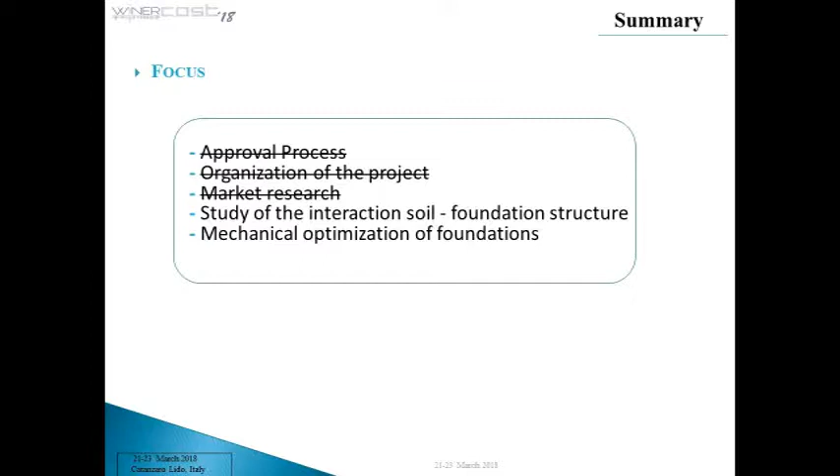The unexpected absence of Mr. Severini forced us to modify our presentation in a very short time. As a result, we will not dwell on the complex approval process, the organization of the project, and the market research required since 2008 to make possible the realization of this project. We have just some slides on this focus, like a summary. We will focus our presentation on two technical points, the study of the interaction between soil and foundation, and the mechanical optimization of the foundation and the secondary steel. So I can give the floor to Sarah.

Yes. So good morning. First of all, just an introduction. The wind is used to create clean and inexhaustible energy without producing pollution and emissions in the atmosphere, always respecting all the standards provided by Horizon 2020 and the Sustainable Development Goals. Especially offshore wind energy is a highly potential sector for Italy.

And in fact, between 2006 and 2017, about 20 ideas have been presented, but just one has received all the authorization from local, regional, and national authorities. And it took a long period of time and a difficult bureaucracy. In this slide, we can see the design of the wind farm. This is the future wind farm that we realize in the port of Taranto, in the Apulia region, in the south of Italy.

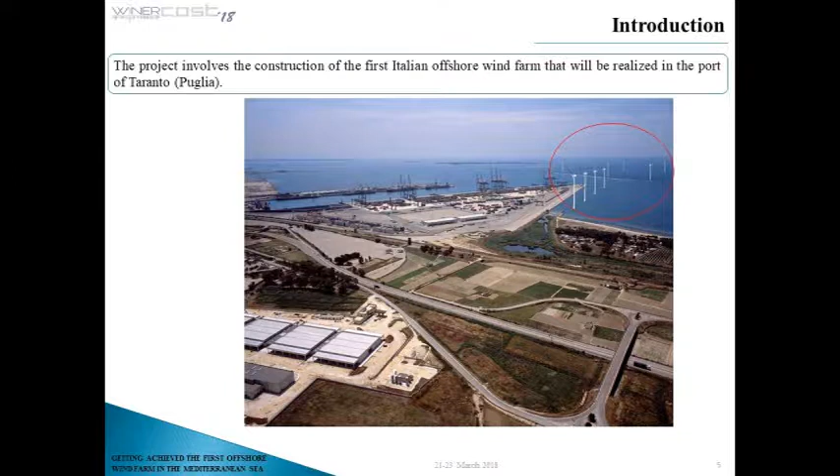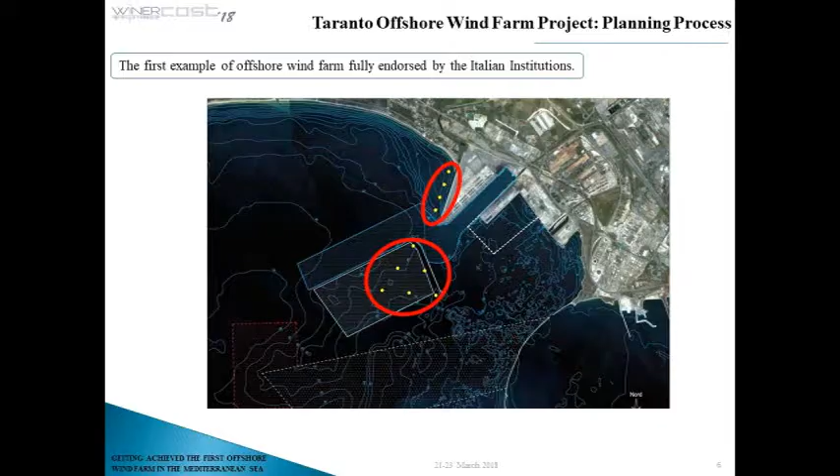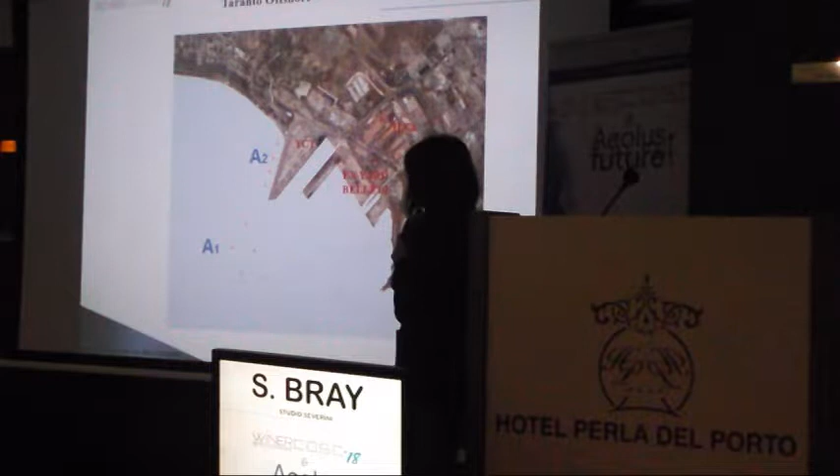And in this image we can see the position of the 10 wind towers. The first 4 wind towers will be located near the quay, and the other 6 will be located near the breakwater. So here and here. Then, okay. Here I want to focus not only on the position of the wind towers, but also on the whole area where we realize the wind farm. In fact, we don't have only the container terminal port of Taranto, but we also have a highly industrialized area.

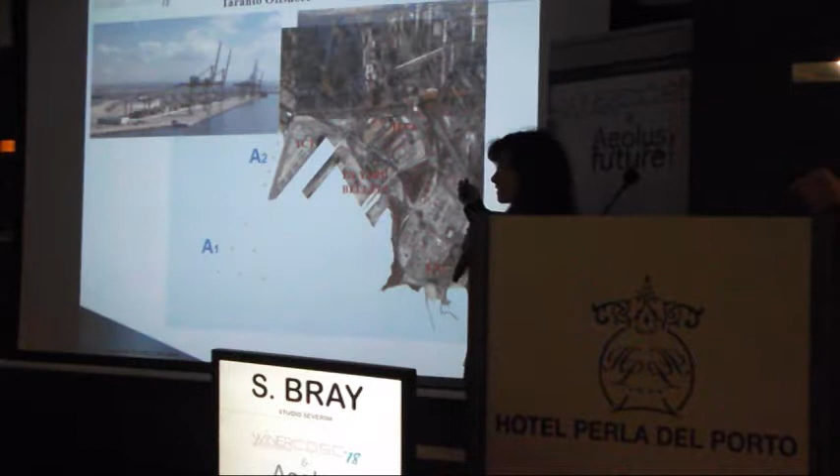In fact, we have Ilva, that basically is a steel mill, and then we have an ex-yard of Belleli company that now is dismissed. And we have also the Eni refinery. You know Eni, it's an oil and gas company, so this area is highly polluted. There is a high level of dioxin pollution, and we have also a high level of blood cancer, especially in children.

So, if we see all the layouts, this is photo editing obviously, we can see the good impact also in the view and the skyline of this kind of installation. In fact, we have the positive evaluation of MIBAC. MIBAC is the Ministry of Culture and Tourism.

That said that this kind of installation will affect in a positive way not only the industrial part but also the commerce and the view and the skyline, obviously, because this is an area with a lot of industry, so this can affect in a good way.

Then we can see very briefly all the bureaucratic procedure, because the state property concession of the project area has been formally requested to the MIT in 2009, but during this period we have a long period of time, and during this period of time we had other requests, other authorizations, the environmental compatibility decree and autorizzazione unica for the construction and the operation of the plant. But after obtaining this authorization, the state property concession has been granted in 2016.

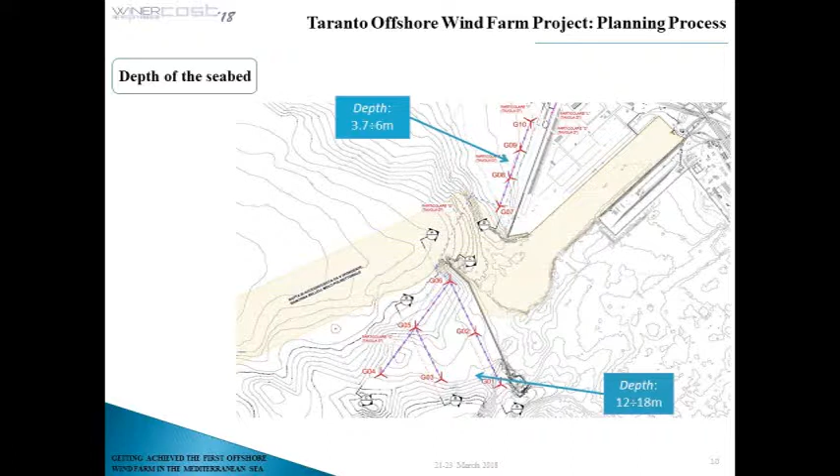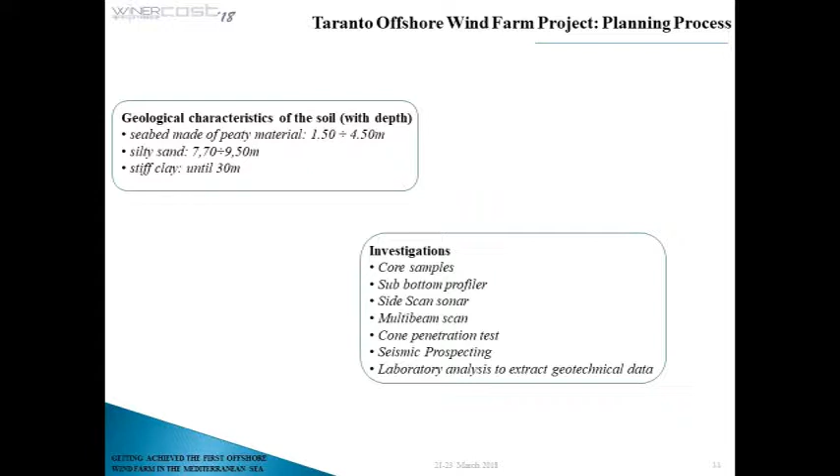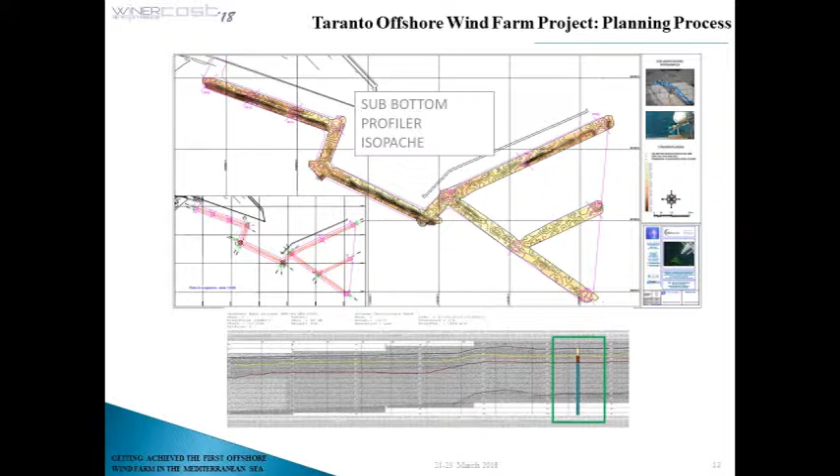Then we did a lot of geotechnical analysis, a lot of investigation on site, and also laboratory analysis to extract geophysical and geotechnical data for the characterization of the soil. And the investigations were sub-bottom profiler for the lithostratigraphy of the soil under the seabed. Then, as we can see here, the digital terrain model, that is obviously a 3D model for the altimetric view of the seabed. Then we have a multi-beam analysis for the morphology of the seabed.

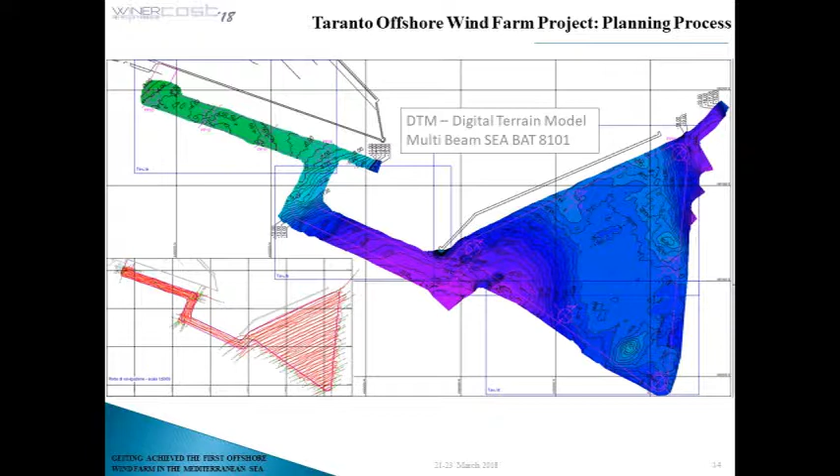And then we have obviously the laboratory analysis, because we took 50 samples from each investigated vertical. The vertical coincides with the position of the 10 wind turbines. So we took 5 samples from each vertical, so the total number was 50. And then we have a lot of laboratory analysis from the geophysical part.

So here we can see the stratigraphy of the soil, and basically the soil is an over-consolidated clay. It's an over-consolidated blue-gray clay, and in general there are not many offshore wind farms with this kind of soil. This is more complex for the elaboration of the data, for the simulation that we have done. It's complex to extrapolate the representative geophysical and geotechnical data for the simulation that we have done for the interaction of foundation and soil. And then, these are the samples. Okay.

Okay, these are the design tools that we have used. We've done a lot of simulation. We have done static and dynamic simulation, modal chronological simulation with SolidWorks. We have done geotechnical simulation with MIDAS GTS NX. We extrapolate P-Y curves from Lpile. And we did the drivability analysis for the choice of the hammer that will pile the foundation.

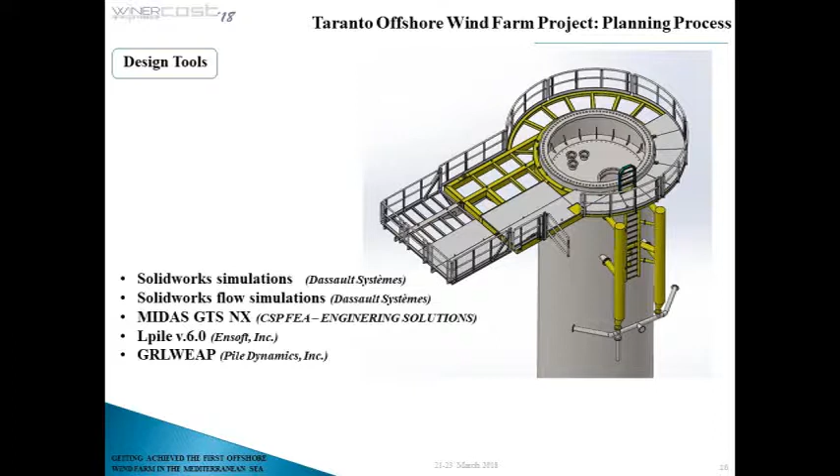So this is the model that we did with MIDAS. This is the soil. The soil is a solid object inside MIDAS, and then we did this. This is the water table, and then we did also the model of the monopile, that is a shell element. The mesh is a hybrid mesh, and what is important to know is the model of the soil, because we choose the constitutive model, and we put inside MIDAS the geophysical and geotechnical data required by this model.

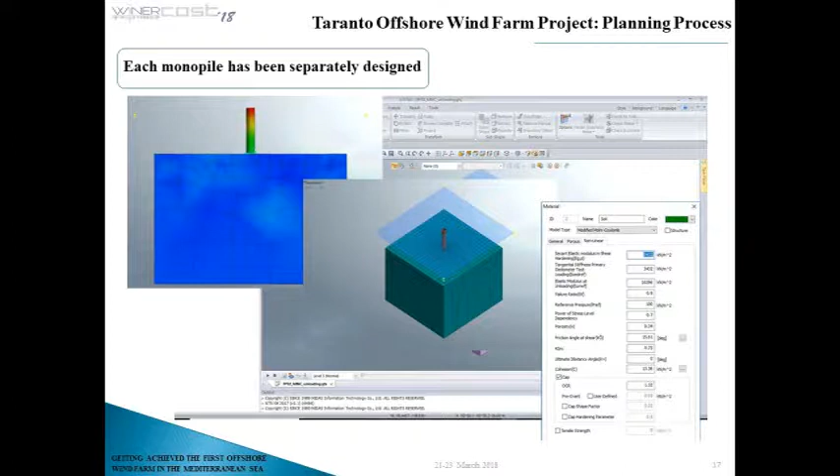But what have we done? We follow the NTC 2008 standards that are basically national standards. We use IEC international standards, to perform ultimate limit state analysis, to perform operating limit state analysis, and to perform seismic analysis. And basically the aim of this analysis is to know if this system, the foundation and the soil, works subject to this kind of load that is transmitted by the wind tower to the foundation. And it works. There are no plastic surfaces, there are no breaking wedges, there are no breaking surfaces. So we can go on.

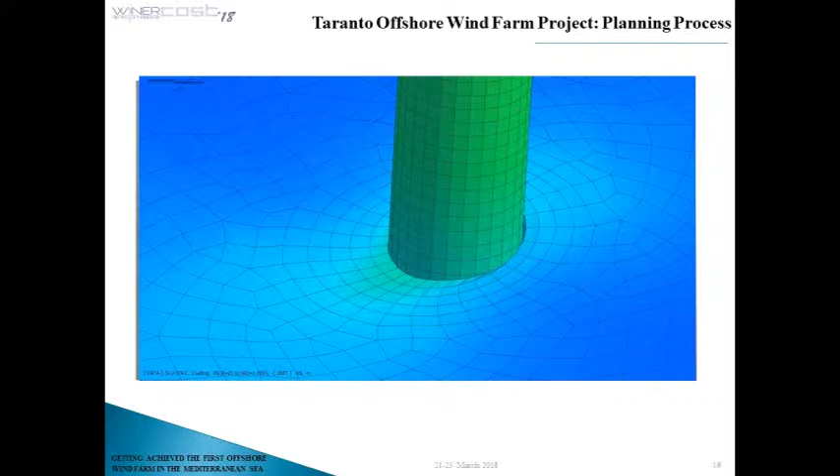These are the deformation of the soil, of the seabed, basically. So we perform also a drivability analysis with GRLWEAP to choose the system that, in the operative part, in the first step of the installation of this wind farm, we perform the driving of the pile to the final depth into the soil.

And with GRLWEAP, we choose an integrated system with two kinds of items: a vibro driver, that is this, and a hammer. But why is there an integrated system? Why don't we choose only the hammer? Because there is a limitation for the noise in the site. So we cannot use only the hammer because it produces a lot of noise.

So for the first part of the driving, we perform it with a vibro hammer that has a high frequency. The vibro hammer arrives to a depth of 15 meters. And then to the final depth we perform the driving with a hammer. But what have we done?

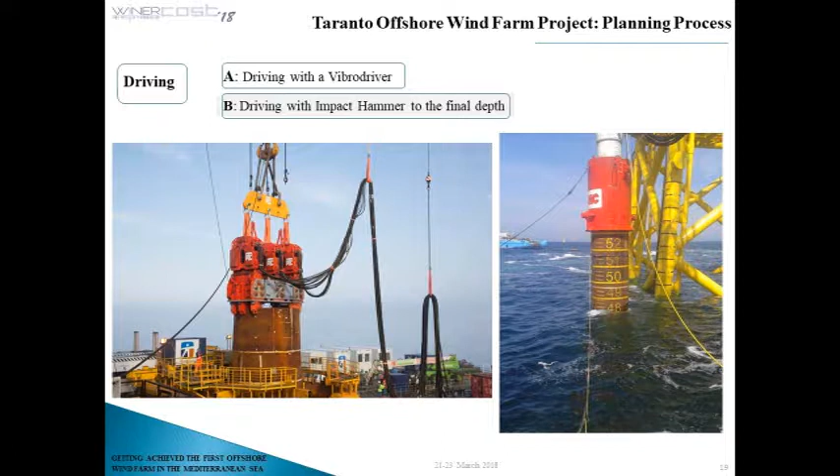We did a simulation analysis of this part of the drivability analysis in SolidWorks, because we want to know if the monopile subjected to vibro and hammering loads, and especially the bolted flange that is on the top, at the edge of the monopile, will be overstressed. And this is the result: there are no overstresses because the von Mises stresses are below the maximum value.

So this is also in SolidWorks, also the drivability analysis. We want to know if this element, that is the hole for the passage of the electrical cable inside the monopiles, would be overstressed. It is not. So obviously also the vertical tolerance is good. It remains below the maximum vertical error, that is 0.5 degree.

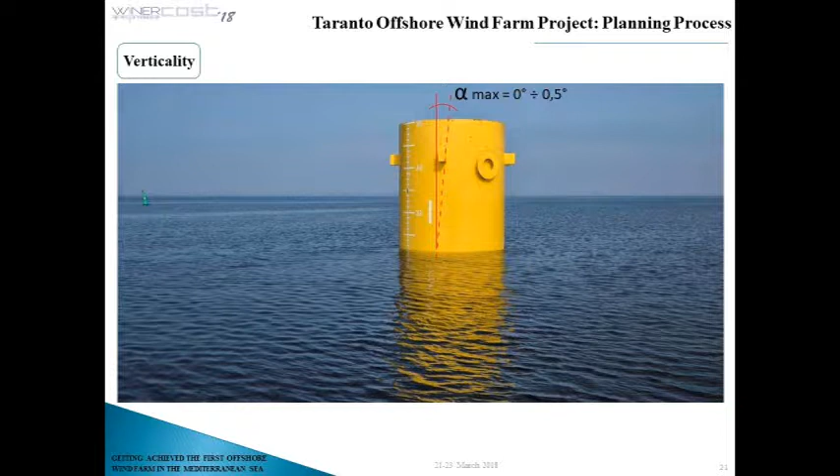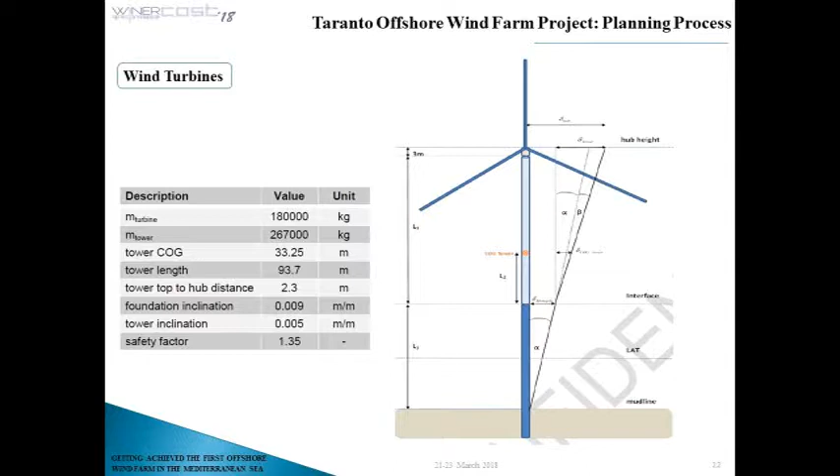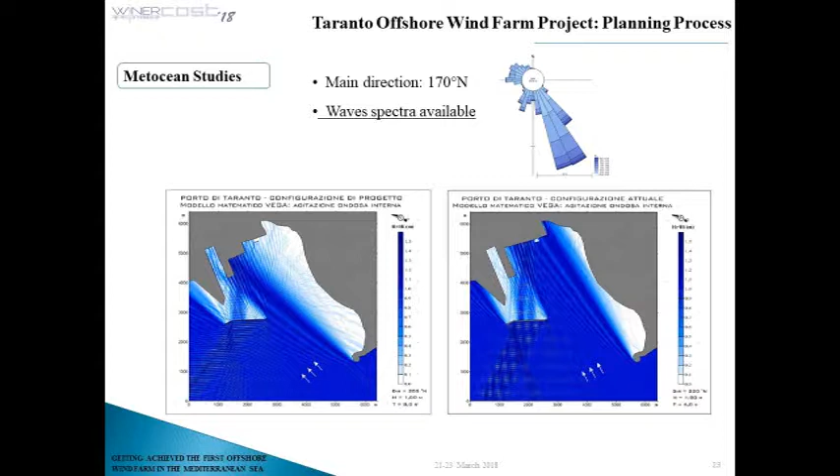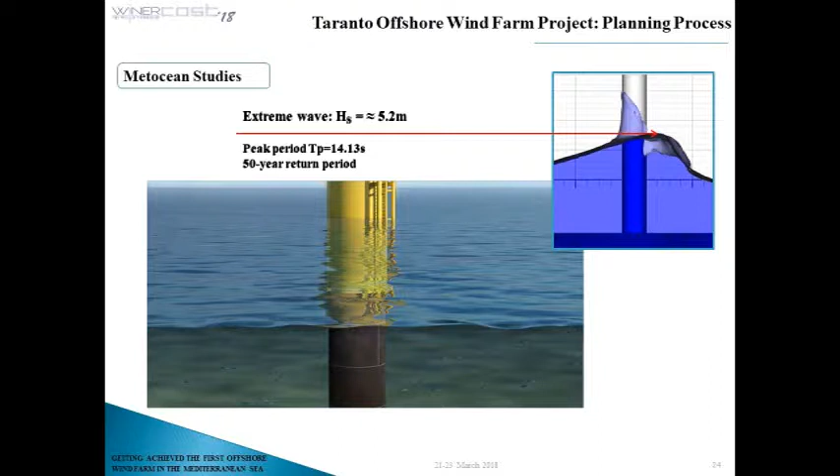This is briefly the metocean study. The rotor diameter? 120. This is basically the data used by Senvion to design the wind turbine: the main direction, the wave spectra, the extreme wave, the peak period, the return period of 50 years, and so on.

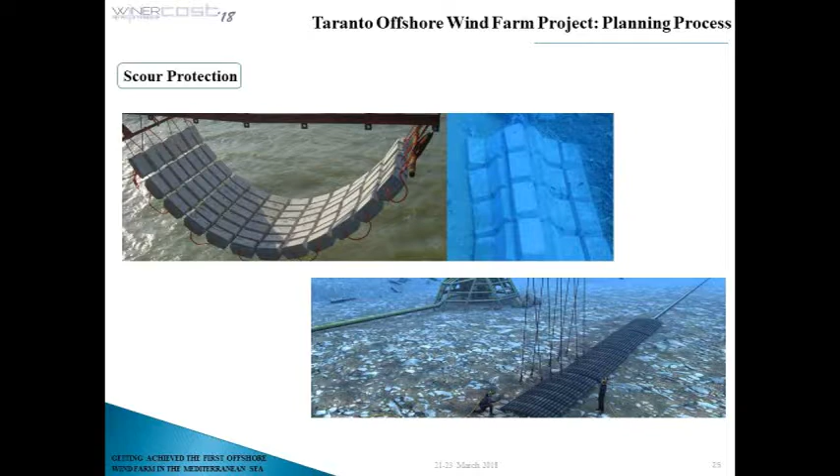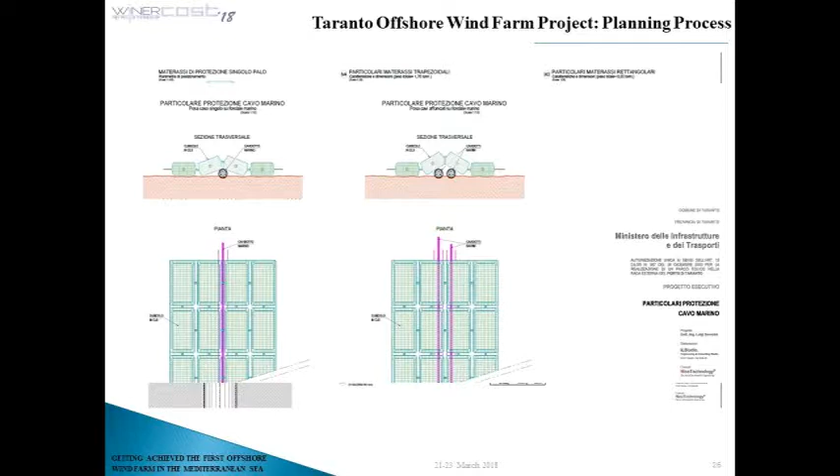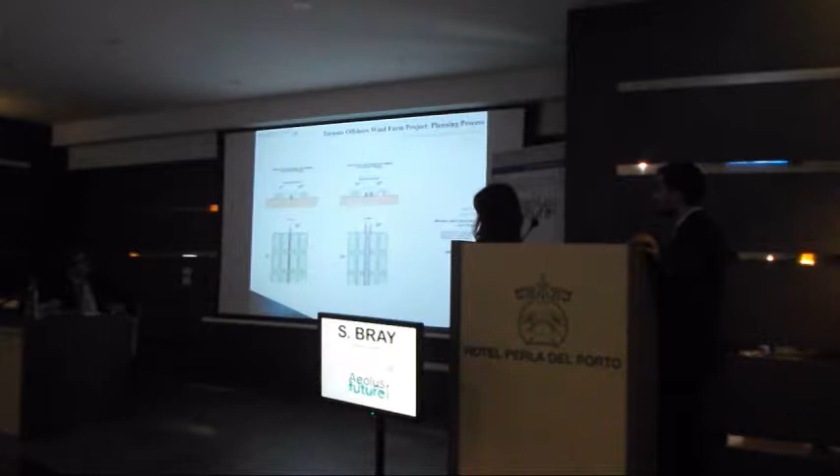In fact, we can see here around the monopiles these mattresses, here and here, and above the electrical cable, here, the mattresses. So now I give the floor to Alessandro. Thank you, Sarah.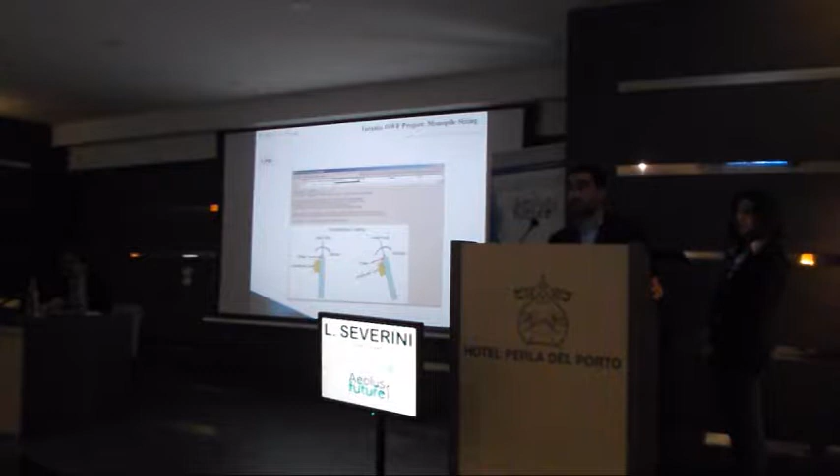The grade of steel is S355 from European standards, and the loads for calculation at first were from the Vestas V90 turbine.

LPile has a lot of different soil models: API soft clay, stiff clay model, liquefied sand, and many others. And for each model it's possible to choose a lot of different coefficients. We checked some of these models, with discussion on which one fits better in our soil, and anyway, with the first design in LPile, a bit raw, we could make the modifications of the monopile: the thickness of the wall, the total length, the length of single steel shell.

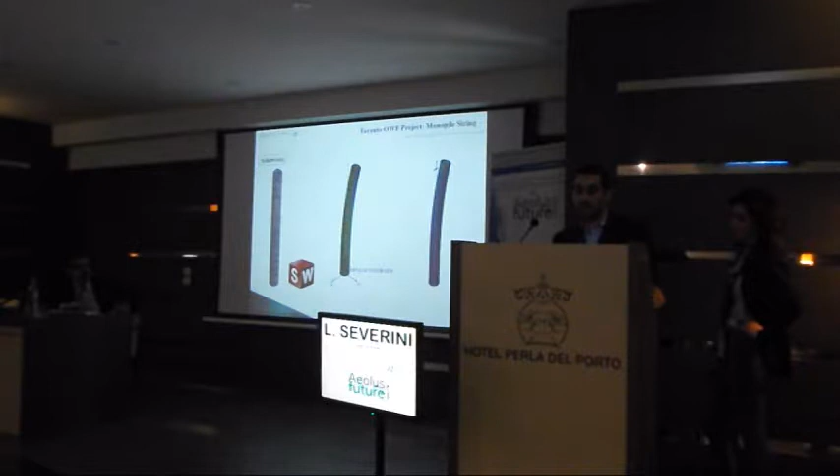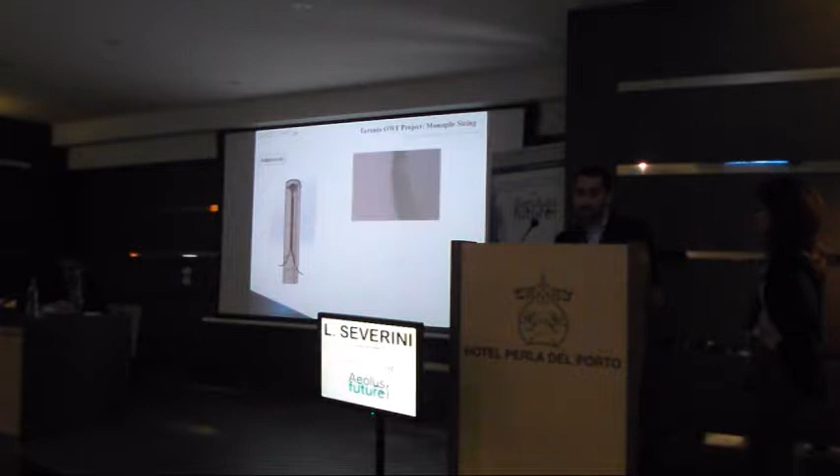With this first design, we made a 3D model in SolidWorks, and we did the simulation with the Winkler springs to simulate the soil effect. The preliminary 3D sizing was done, and we gradually analyzed every critical point: welds, marine cable holes. This is a screen of the mesh, the thickness and the junction. A not secondary goal during the design was the optimization of the cutting plan to reduce cost of raw material, waste and welds. We did it, and this operation has been possible only with accurate finite element analysis.

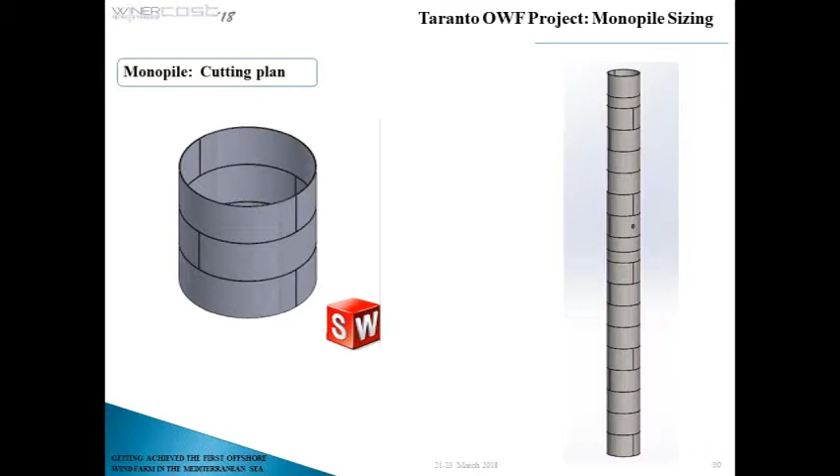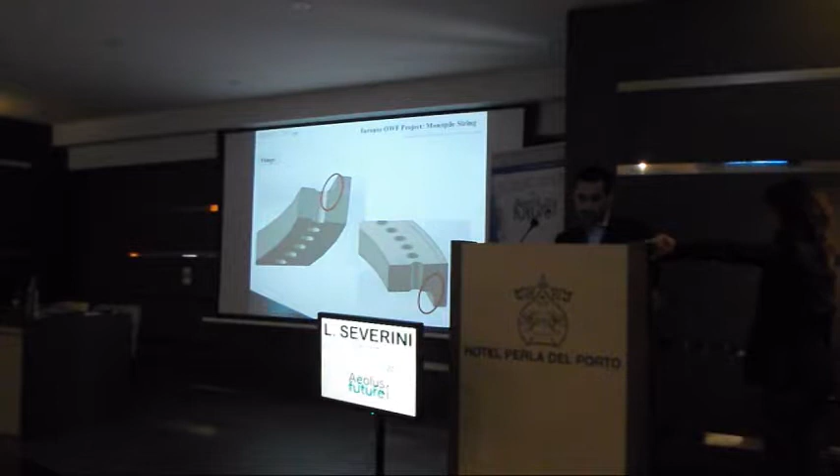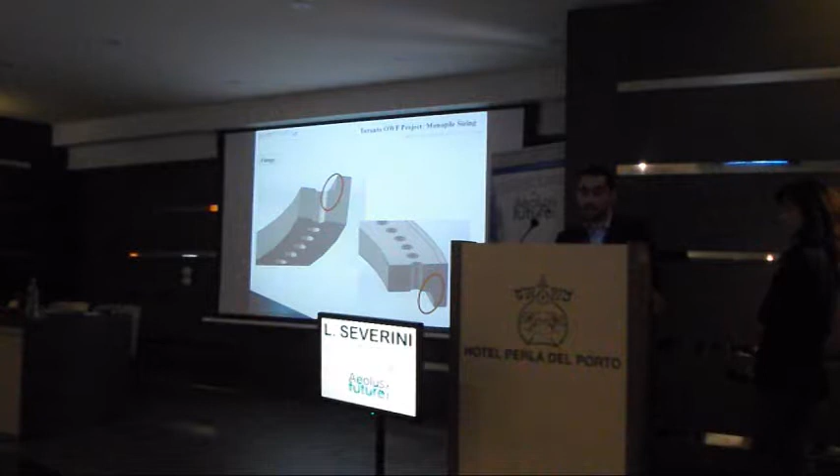In this picture, you can see the flange of the tower base of one supplier. You can see the small radius near the neck of the flange. And this is a review of our flange with a radius of 40 millimeters. This is important because our project does not have the transition piece and has a direct mount between monopile and tower.

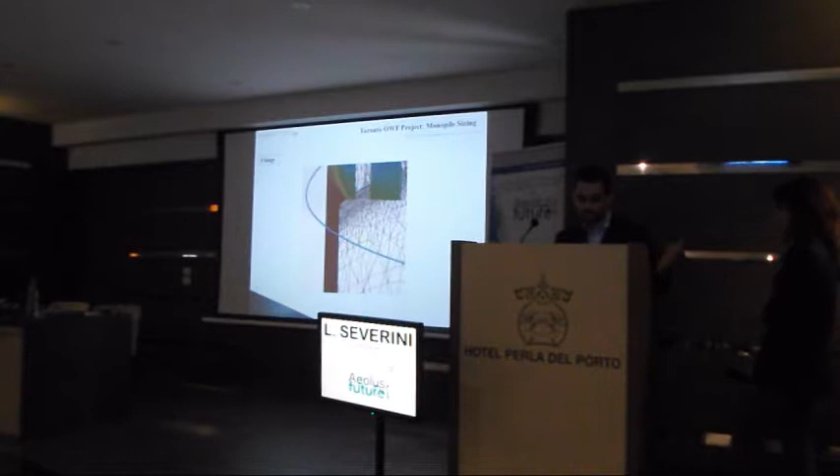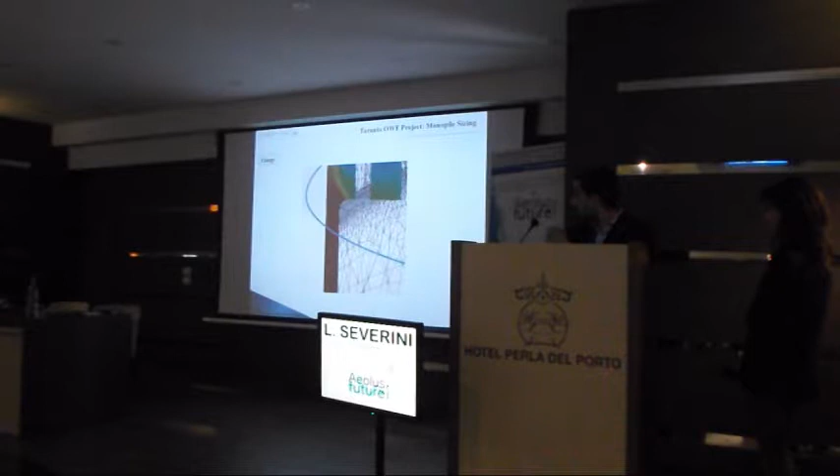Now we can see the result of the hammering simulation, with stress result and mesh. It's not the last review, but I put this image because the stress during the hammering is very clear. And this is another simulation with the stress near the neck of the flange.

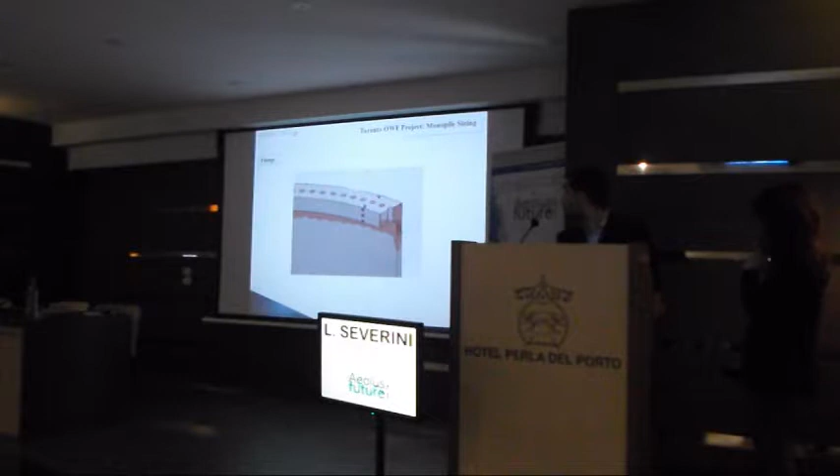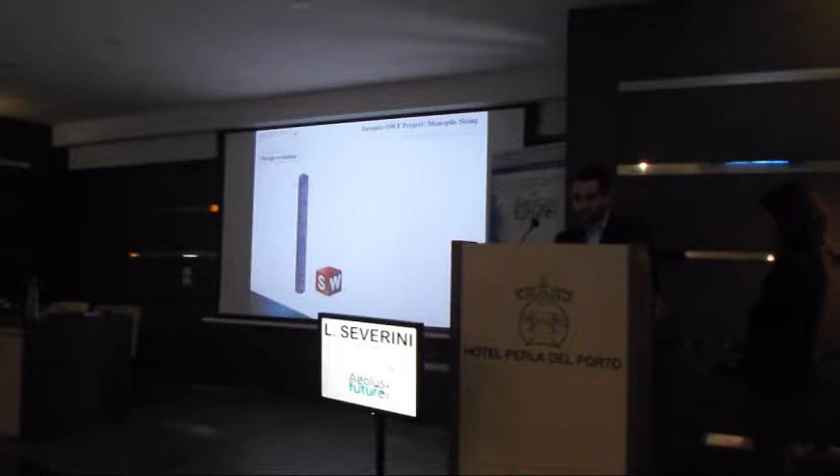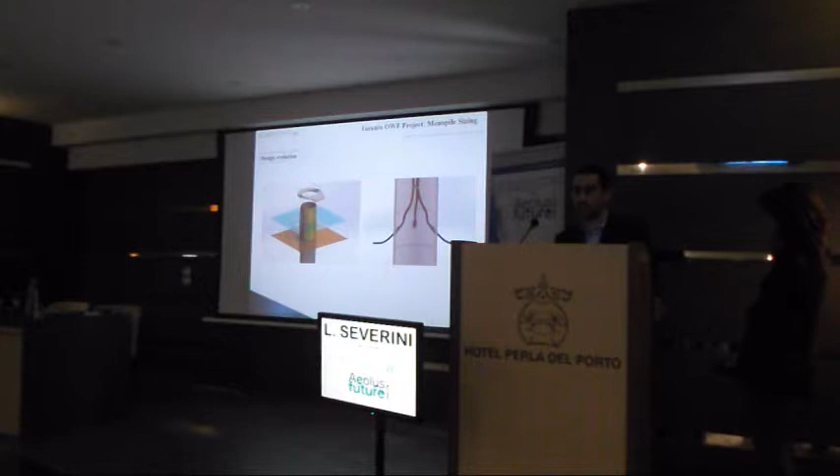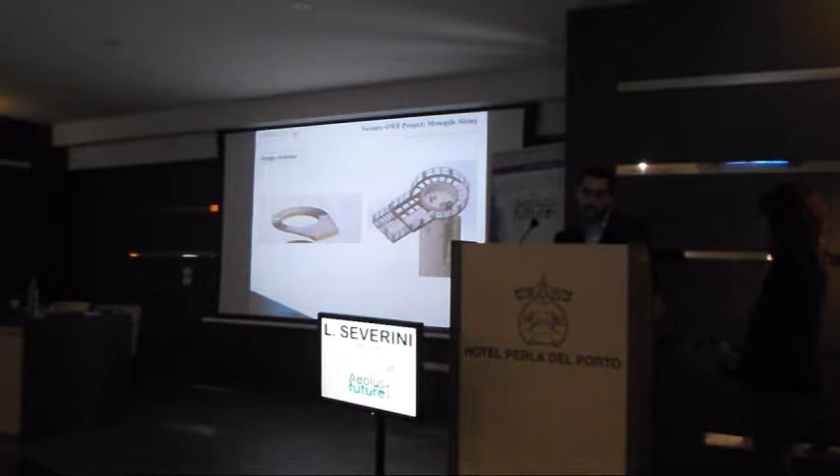During the review, the design of the monopile changed, not a lot, but this evolution is due to, for example, the different turbine provider and the solution for the marine cable entrance. For example, this is the old solution with the external J-tube in red, and this is the last solution with the sealing system and the internal J-tube. The dimension and solution for the platform: this is a steel and concrete platform, the old one, and this is a totally steel platform with grating system. We modified the internal platform, and this is the final solution.

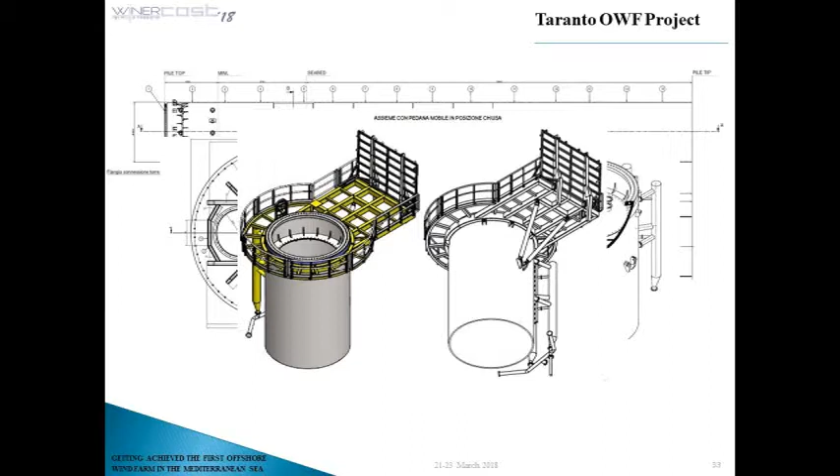So this project hasn't been simple. A lot of activities in this kind of project are not consequential, but contemporary and iterative. But we did it, and Studio Severini, with the support of Nice Technology, has managed and fully carried out all the activities necessary for the complete realization of this project: bureaucracy procedure, foundation design, power transmission and grid design, structural and geotechnical checks.

The goal for the future is to focus the research on the development of other wind technologies, more suitable for Mediterranean wind and wave conditions, for example the floating turbine and the kinematic system.